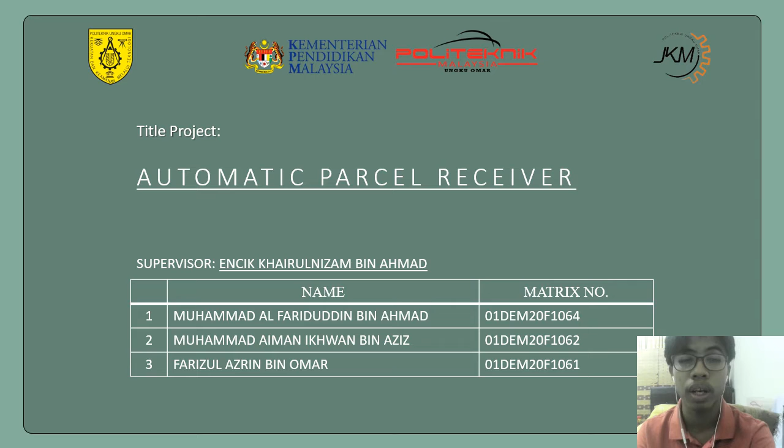This is the title of our project, Automatic Parcel Receiver. To give a glimpse of our project, I will explain a little about it. As the name suggests, the project is invented for receiving parcels that have been delivered to us automatically.

Without our presence. So how did we get the idea for this project? At first we discussed what is trending in our society, and we found that online shopping is something everybody in our society is doing right now.

So what is online shopping? Online shopping is a form of electronic commerce which allows consumers to directly buy goods or services from a seller over the internet using a web browser or a mobile app. Nowadays, we literally can have everything we want at the tip of our fingers. And of course, we need money to have everything.

This is because we literally can do online shopping with any device we have, such as smartphone, desktop computer, or tablet. It also saves our time because just by clicking on the item we want, the item will be delivered directly to the address we set.

How will our project be of help to people who love online shopping? We have recognized some problems when we do online shopping, and the project will help solve these problems. So what are the problems that occur when we do online shopping?

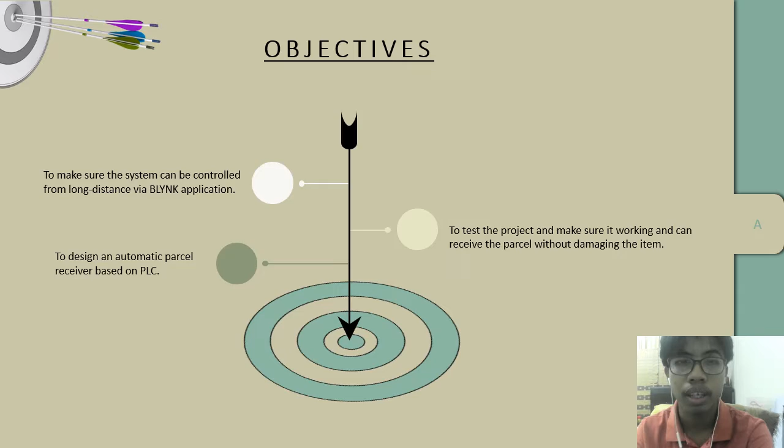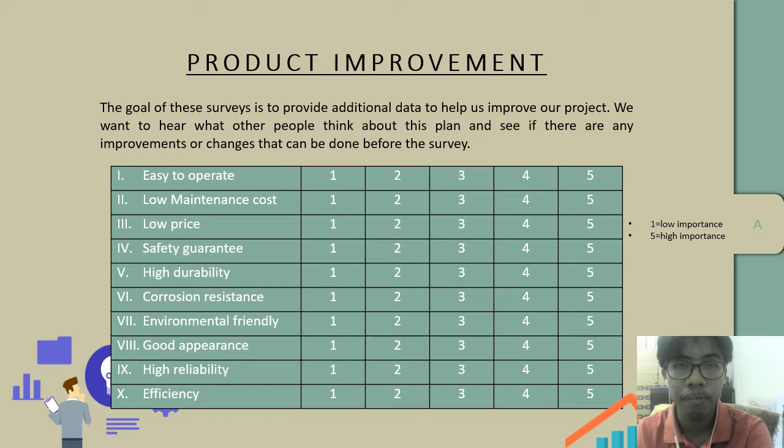So we have done some survey for our project to see people's opinions on what aspect or criteria of our project we need to focus on. The criteria listed here are: easy to operate, low maintenance cost, low price, safety guarantee, high durability, corrosion resistance, environmental friendly, good appearance, high reliability, and lastly efficiency.

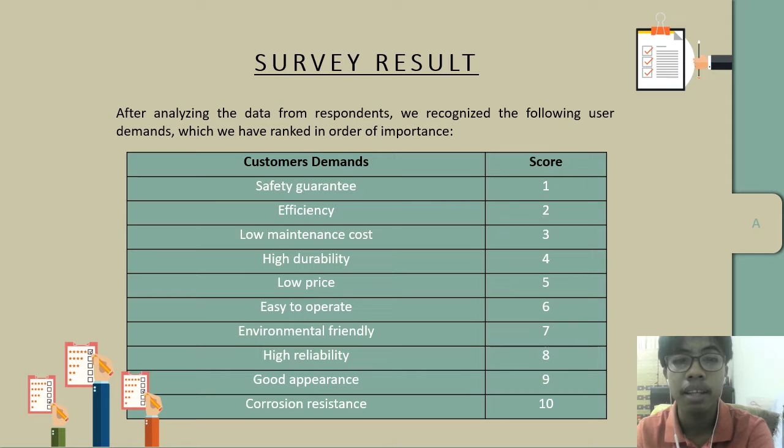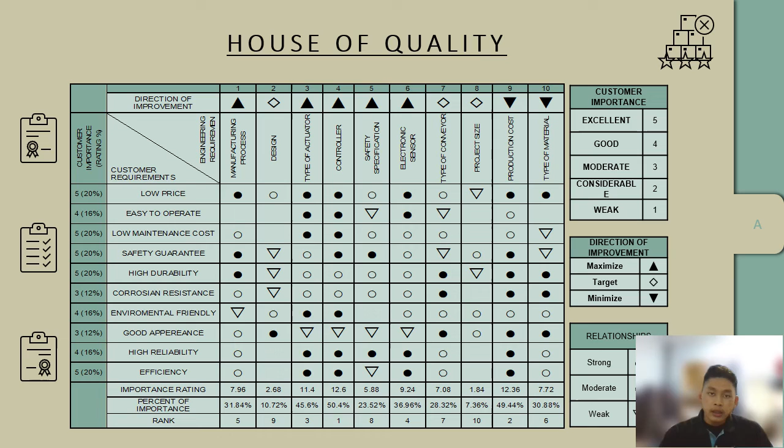By scoring the importance from the survey questionnaire and their relationship with the technical specifications using 1, 3, and 9 — where 1 indicates weak, 3 moderate, and 9 strong — we discovered that we need to focus on the controller of our product, based on the calculation performed in the house of quality matrix. Next is the concept generation.

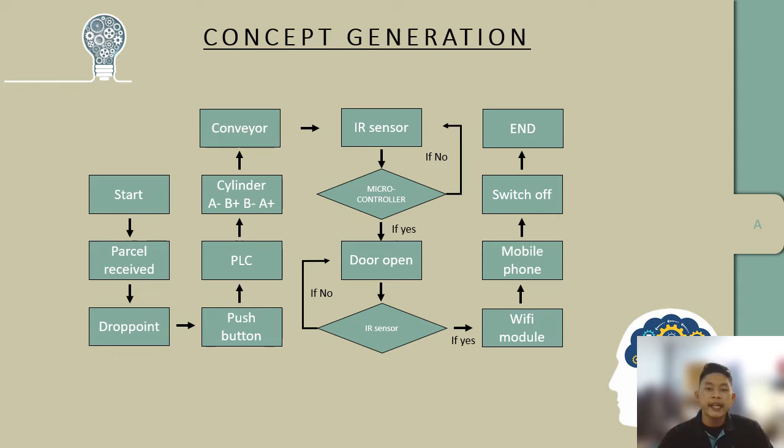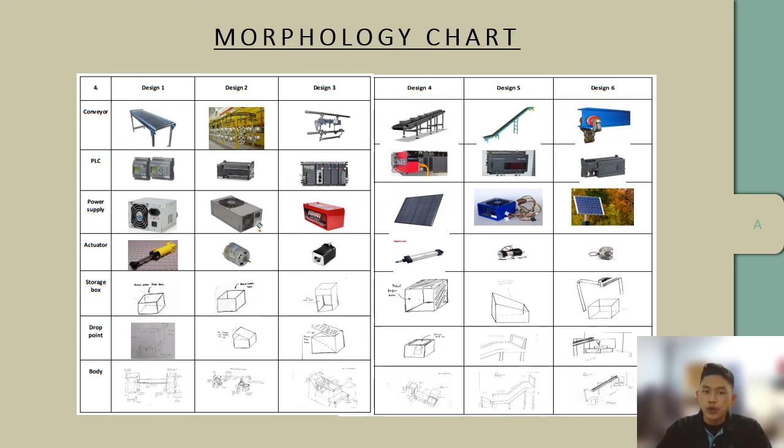After that, we created a morphology chart to know what components each design uses. From the morphology chart, we expand our ideas on how to design our product, and also determine the necessary components, such as what type of conveyor is relevant to use, or what type of PLC controller is suitable for our product, and so on.

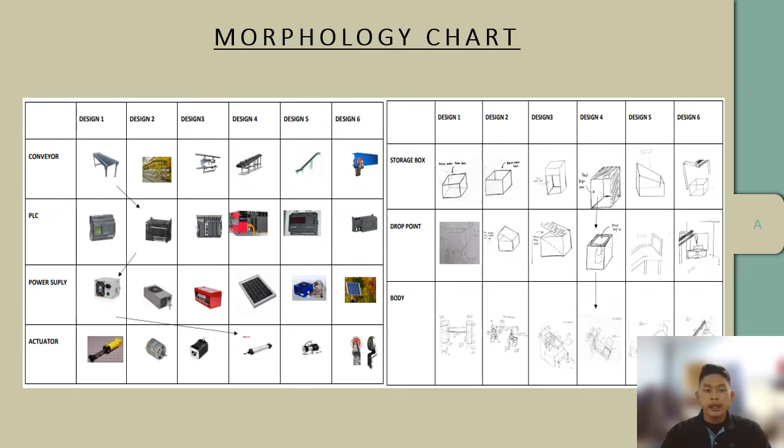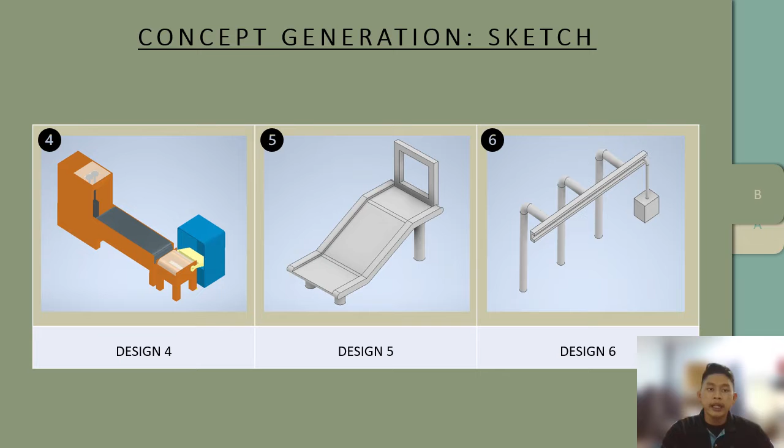Here is our sketch of the concept — this is the sketch for designs 1, 2, and 3, and this is the sketch for designs 4, 5, and 6. From these designs we can know how our product will look, and we will try to explain them one by one.

This is the first concept design in CAD drawing. As we can see, this design uses a pneumatic actuator and a roller conveyor.

This is the bill of material for this concept and the exploded view, which lets us see how this concept is designed more clearly. It uses 10 cylinders in total — 4 connected to 2 stages each to lift the stage, and the other 2 connected to the main body and second body of the project, to move the parcel to the conveyor and into the box. It uses 16 rollers wrapped with a conveyor belt for the transferring system, and has a storage box at the end of the design to keep the parcel safe.

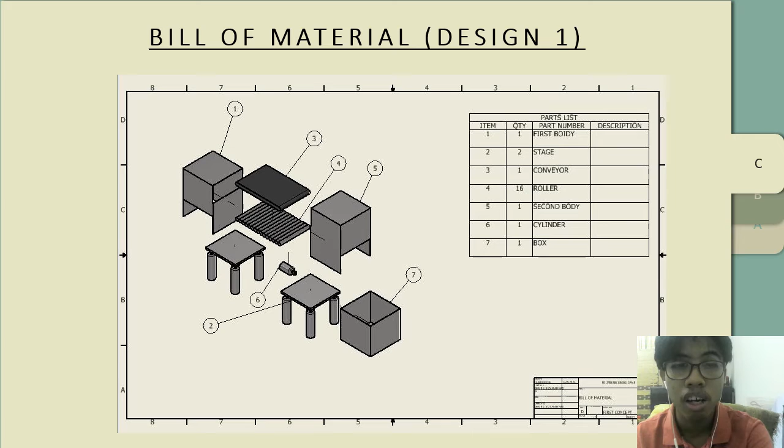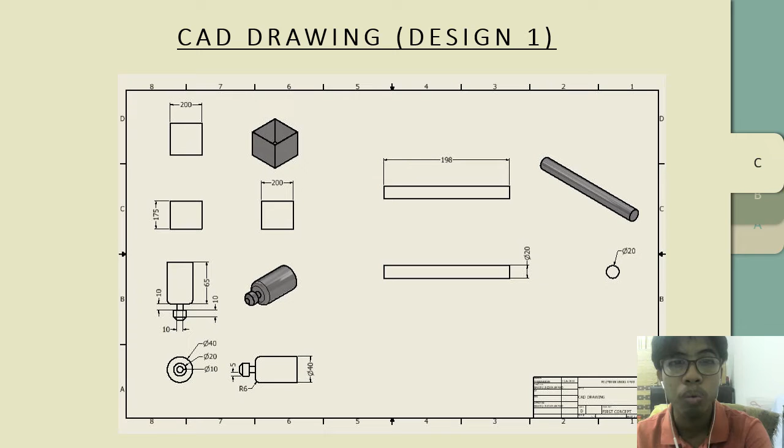This is the detailed drawing of three components: the storage box, cylinder, and roller. This is the cylinder, which will be connected with the second body, and the reason I made an orthographic drawing for this cylinder is that it has a different measurement from the other 9.

This is the conveyor belt that will be wrapped around the 16 rollers. Last but not least, the stage for this project, where the parcel will be placed, which will go upwards and downwards using 4 cylinders as its actuator.

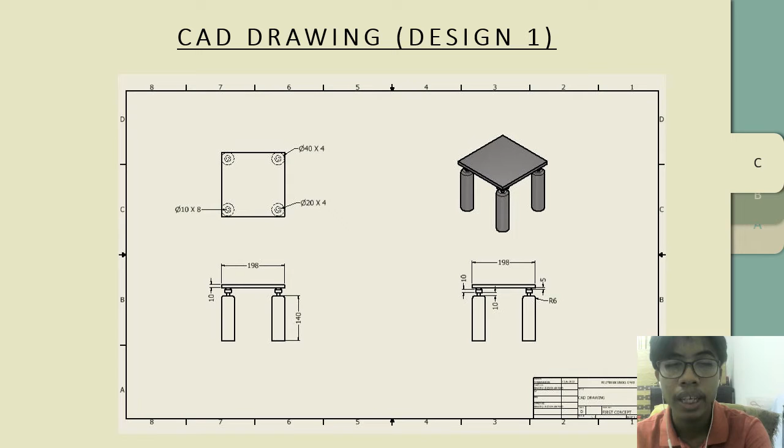This is concept design 2. For this concept, we have the same actuator as design 1, which is pneumatic, but instead of using a roller conveyor to transfer the parcel, I use a hanger conveyor. The hanger conveyor will carry the parcel from the main body to the stage using a net basket hanged to the rail slide.

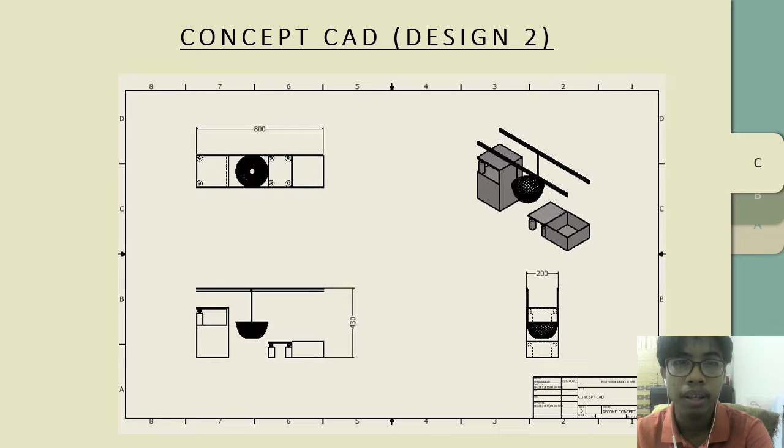Same as design 1, we will look at the bill of materials for design 2. We have the main body connected with 2 cylinders, 2 railways that will connect to the wall or something that can fit the railway position, 1 net basket to carry the parcel, and 2 ropes that act as connectors between the railway and the net basket.

As for the stage, it will have 4 cylinders: the first 2 act to move the stage upwards, and the other 2 to move the stage to a 45-degree position, so the parcel can be removed from the net basket to the storage box at the end of the design.

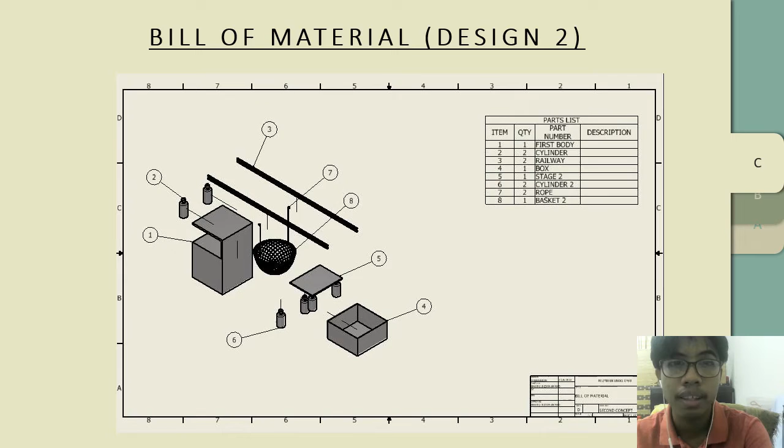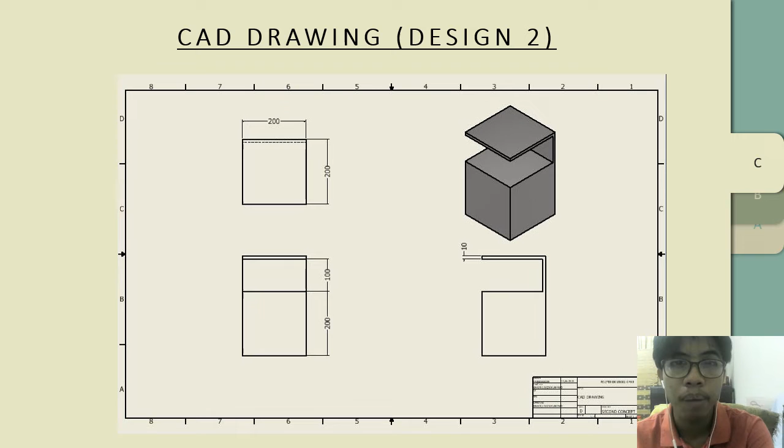Now we will see each part in orthographic drawing. This is the main body; the design allows the stage of the body to be lifted only 45 degrees to the right. To move it 45 degrees to the right, we use a cylinder controlled using pneumatics. This is the stage.

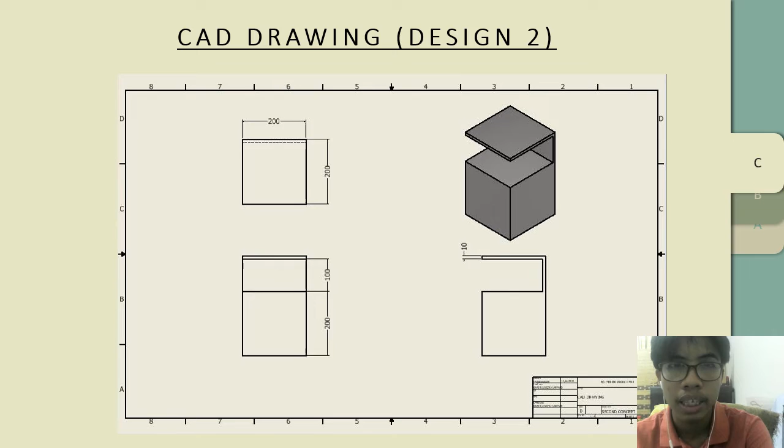As for the stage, there are 2 phases. In the first phase, the cylinder connected to the stage will lift the stage upwards, so the net basket will have a flat surface.

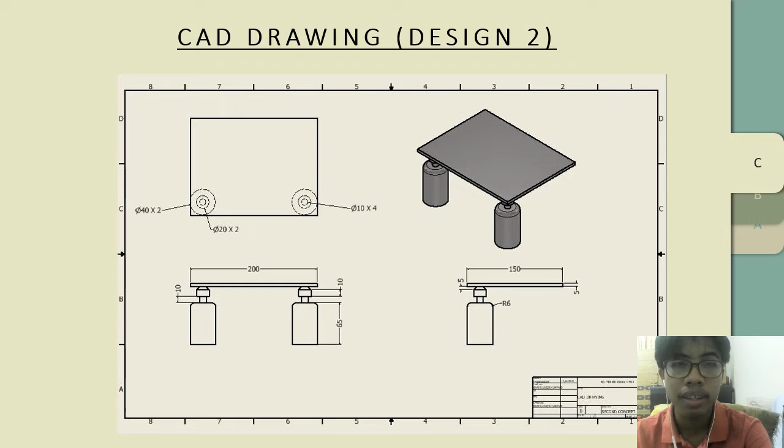In the second phase, the 2 other cylinders, mounted separately from the stage, act like the cylinder for the main body, moving the stage upward to the right only until 45 degrees, so the parcel can be removed to the box.

This is the net basket. The net basket will be built so it will not stretch when it carries something, so the basket will not crash with the stage.

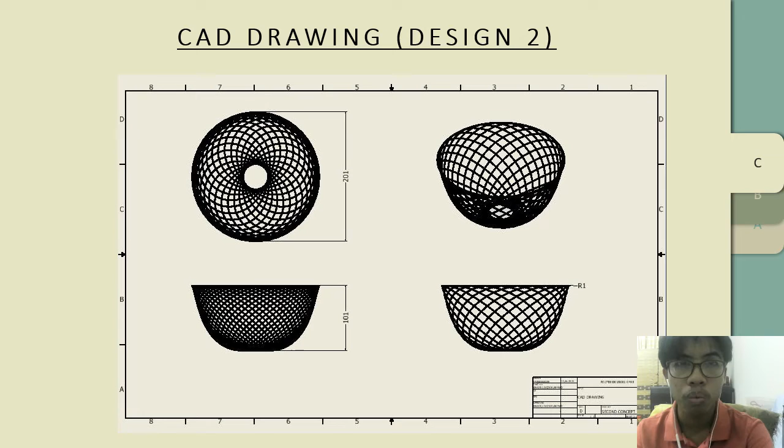This is cylinder 1 and cylinder 2. The cylinder on the left side is to move the main body 45 degrees upward and downward. On the other hand, the cylinder on the other side is for the stage.

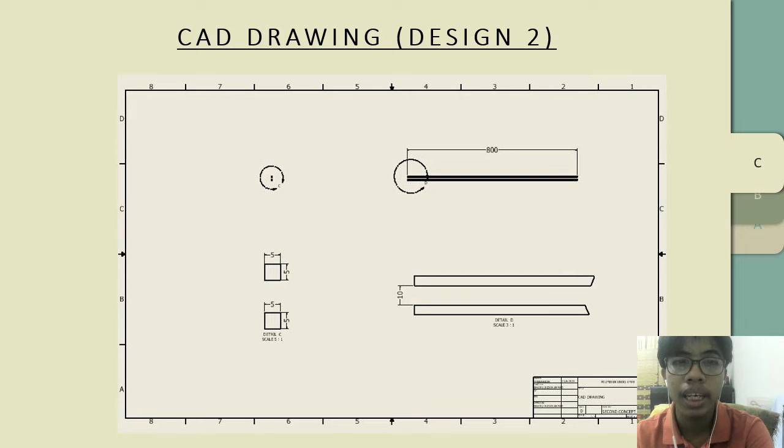This is the storage box and the rope that will be connected to the railway and the net basket. In the last drawing, we have the railway that will determine how far the net basket can go.

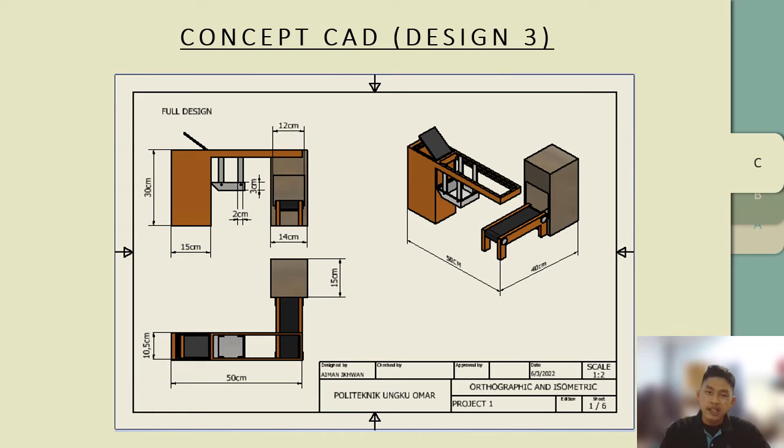For the third design, I decided to use a rail path and belt conveyor for our product because I thought we could reduce the cost by using the 2 conveyors. For this design, our product uses the door type for the drop point, and the storage box is just a storage box without any sensor inside it.

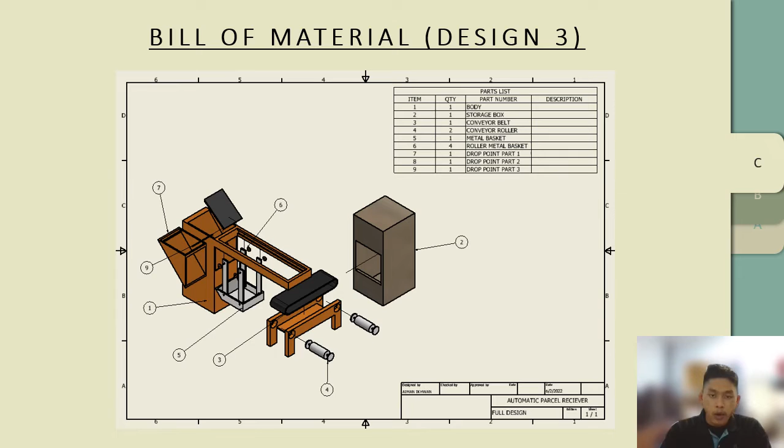This is the bill of materials and the exploded view of my design, which consists of body, storage box, conveyor belt, conveyor roller, metal basket, roller metal basket, drop point part 1, drop point part 2, and drop point part 3.

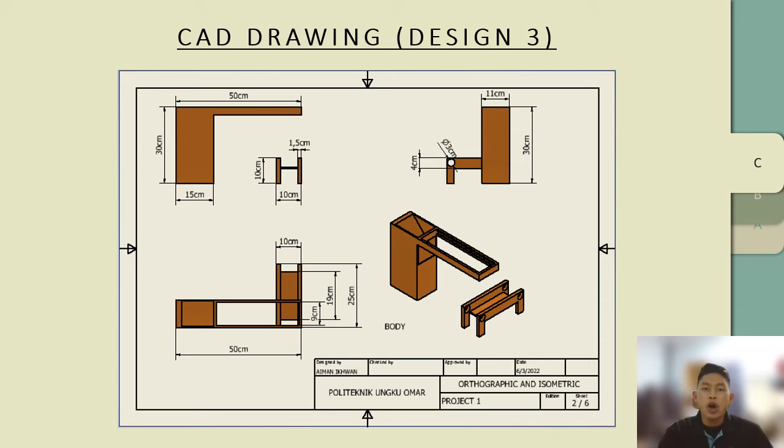This is the predicted dimension of my product, and this shows the dimension of the body of my product.

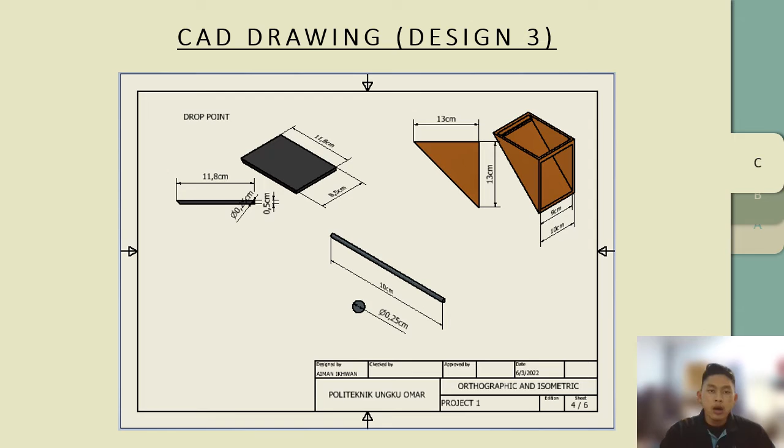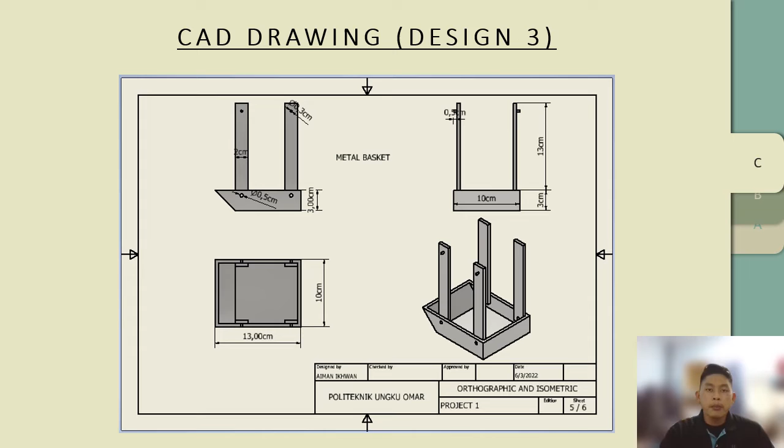This is the dimension for all the components at the drop point. This is the last one, and this is the dimension of the metal basket. It is made from metal, as the name suggests.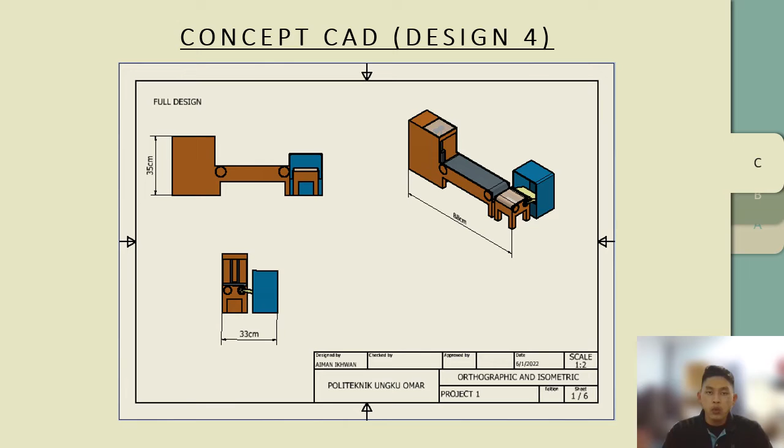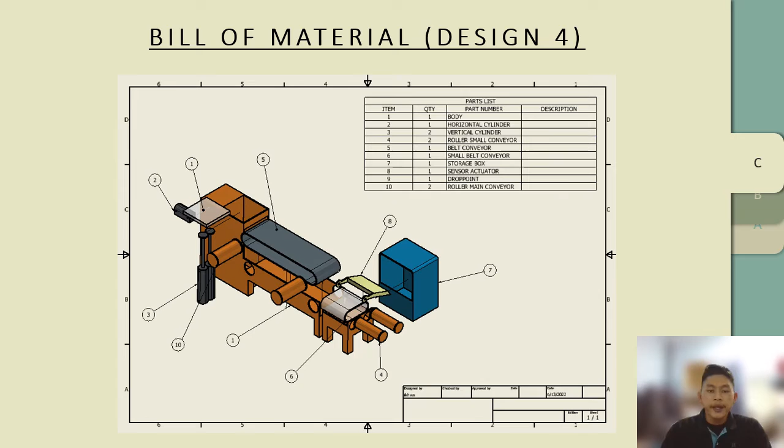Next is the bill of materials for design 4 and the exploded view, which consists of body, horizontal cylinder, vertical cylinder, roller, small conveyor, belt conveyor, small belt conveyor, storage box, sensor actuator, drop point, and roller main conveyor. This slide shows the dimension of the body, which has two separated parts.

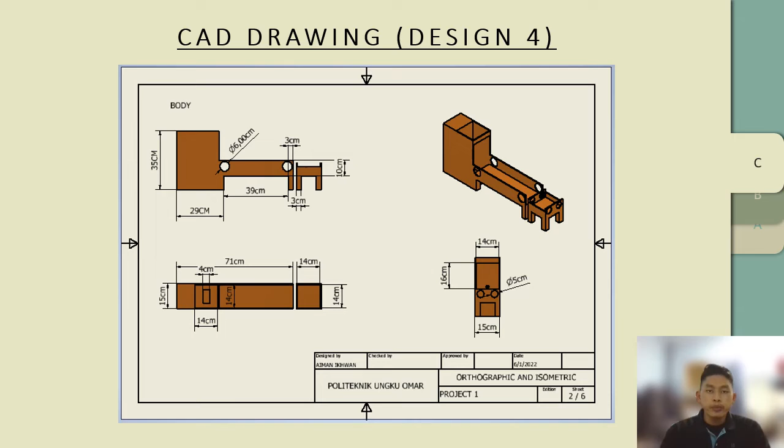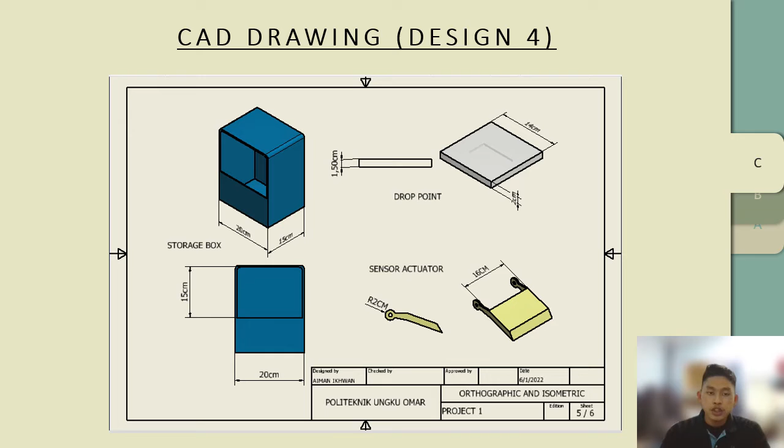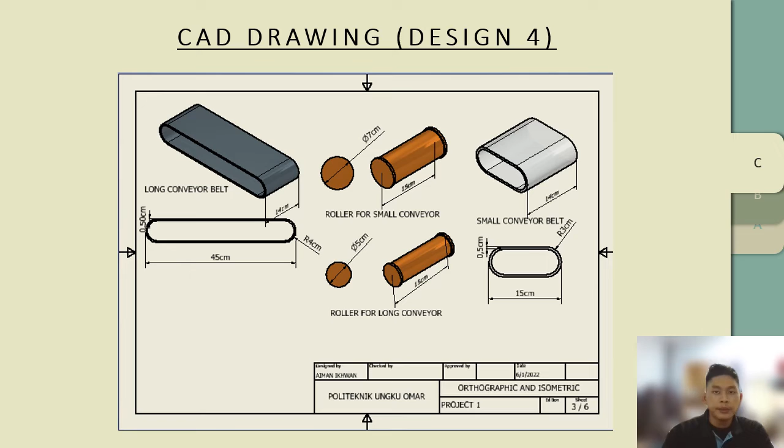Okay, and last is the dimension for conveyor belt, long and small, and between that is the roller for the conveyor belt, which idler roller for the conveyor.

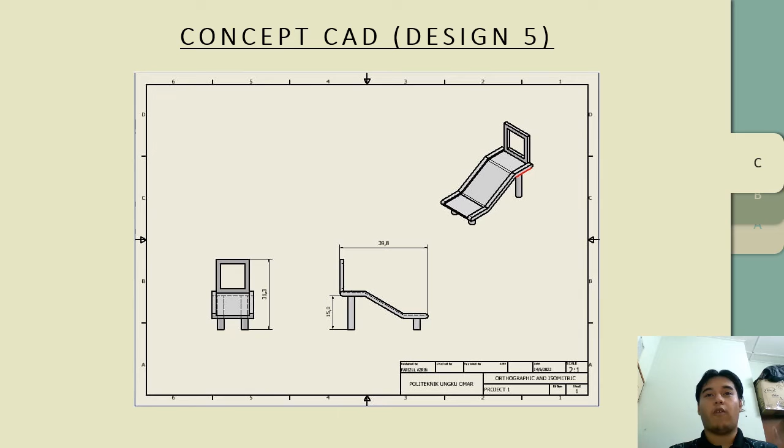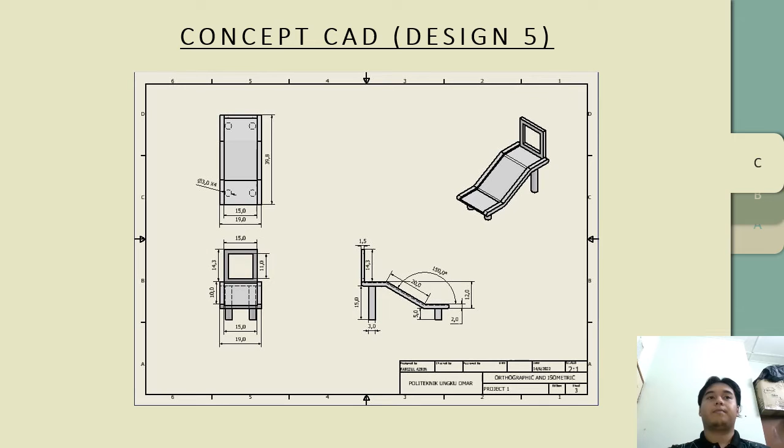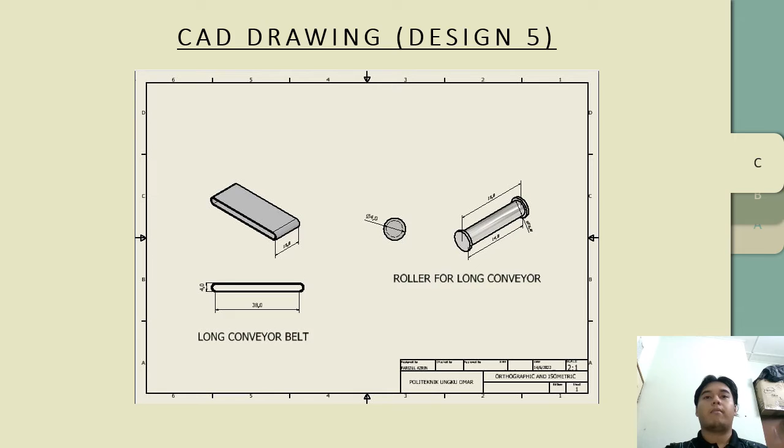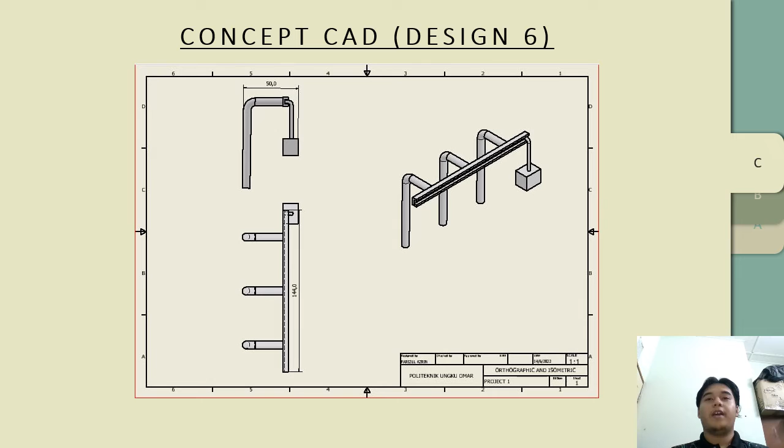This is the concept CAD design 6. This is actually like the hanging conveyor. The parcel will be put in the box at the conveyor and will move to the drop point safely. The bill of material for this design: the first is the hanging conveyor, the second is the box, and the third is the pole. This is the full dimension for the CAD drawing design 6. As you can see, its height is 70 and its width is 144.

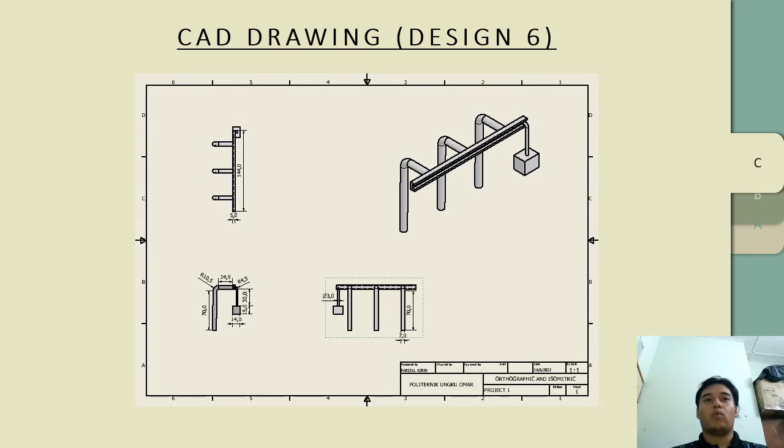This is product tree for our project. The first one is system. Our project uses the pneumatic system and conveyor system. The second one is actuator. We use infrared sensor, Wi-Fi module, 5/2 way DCV and relay. For the housing, we have the body, the drop point, and the storage box. For the controller, we use two controllers, which are the PLC Omron controller and Arduino microcontroller.

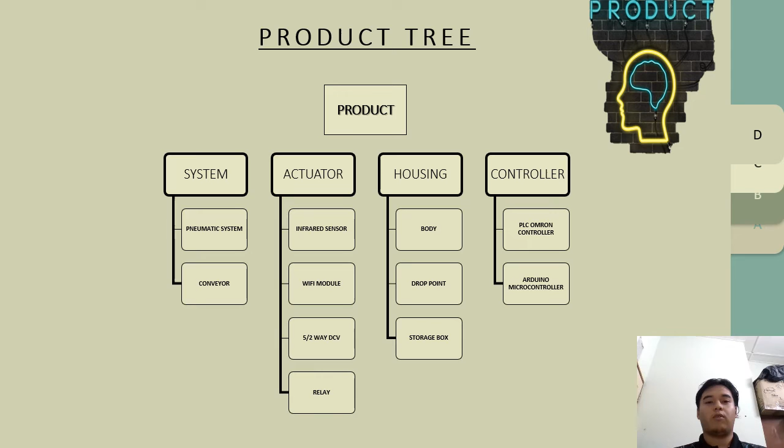This is the project block diagram, and it will be like this. The input is the push button, which when pushed will trigger the pneumatic system, conveyor system, and microcontroller simultaneously. After the parcel is received and the push button is pushed, the pneumatic system will make its sequence, which is A minus, then actuated by IR sensor, then make a B plus signal, then do the same like B plus, B minus, and A plus. Next, the parcel will be pushed by cylinder B and reach the conveyor system. After that, the microcontroller functions to control all the sensors from the IR sensor into the mobile phone, which is the output of the system.

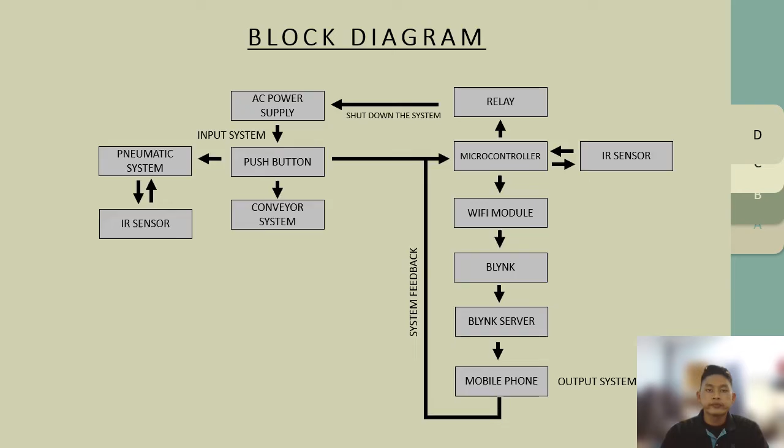This is the circuit of our project for the pneumatic system that we created using Automation Studio, for the sequence A minus, B plus, B minus, and A plus. Here we have the circuit diagram for the external electrical circuit used for safety. At the bottom we created lights as indicators. Green shows the processing running, blue is for the rectifier to convert AC to DC to trigger the microcontroller, yellow is for the conveyor, and white indicates the system is at the shutdown state.

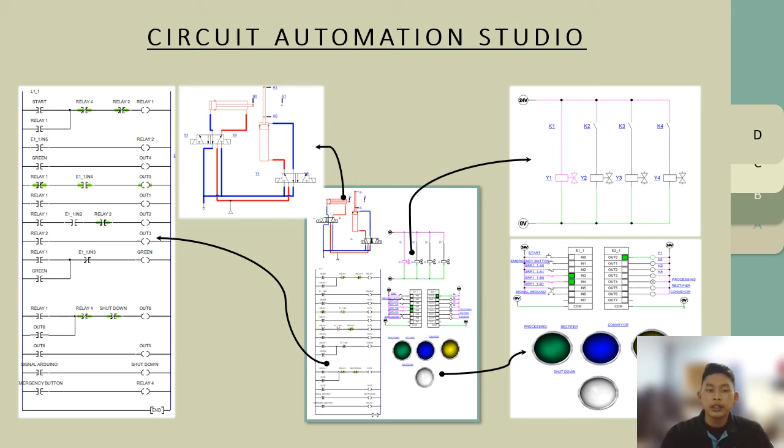This is the simulation of the pneumatic circuit that we created using Automation Studio. We push the start button: A minus, B plus, B minus, and A plus again. At the bottom it shows the light to indicate our process, and we play it 2 times.

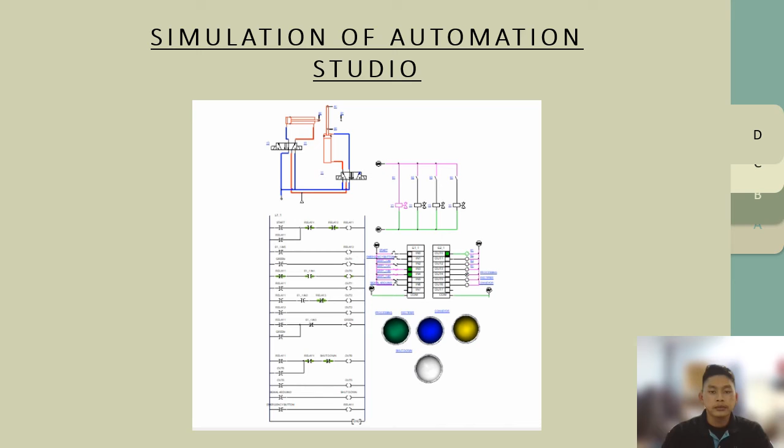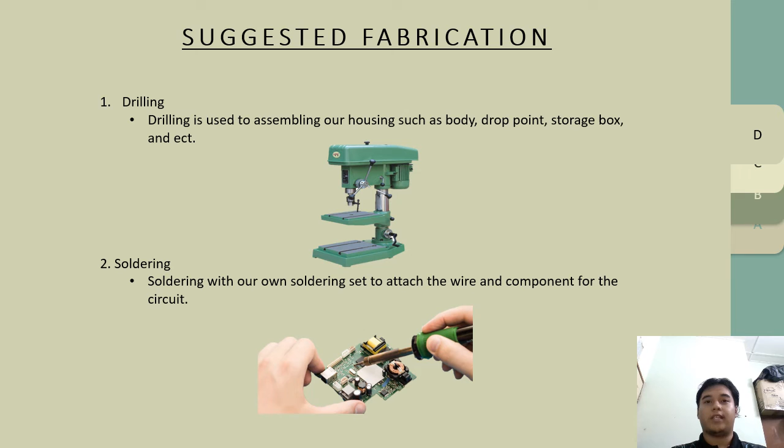For the suggested fabrication, the first one is drilling. Drilling is used to assemble our housing such as the body, drop point, storage box, and anything else. The second one is soldering, using our own solder set to attach the wire and components for the circuit.

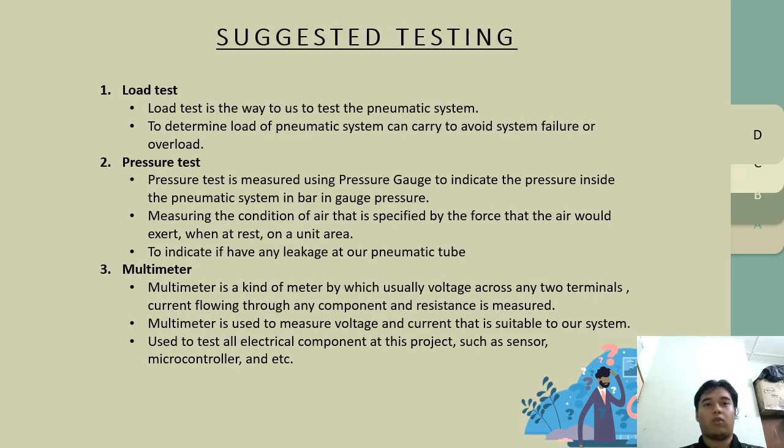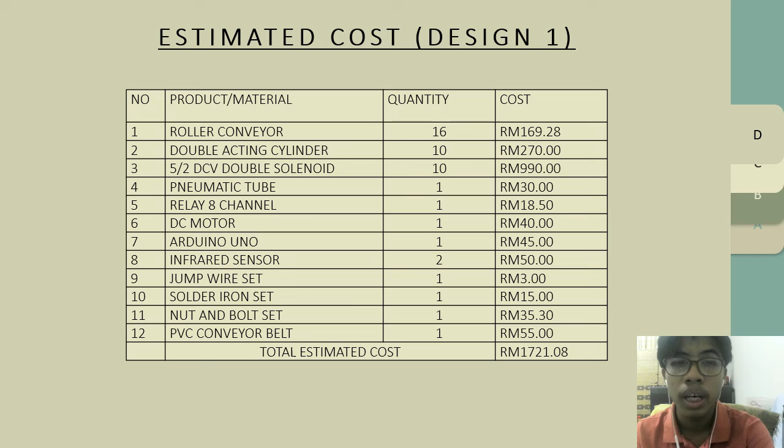Adding with some other components such as pneumatic tube set, and electronic components like DC motor, relays, sensors, and Arduino.

As for the second concept, we have a total of RM1418.90. It doesn't differ much from the total price of concept 1. The only reason it's a little lower than concept 1 is because it used 8 cylinders in DCV instead of 10. It also has almost the same components as design concept 1, which are pneumatic tube, DC motor, relays, sensor, and Arduino. The only difference is the type of conveyor set that we need to buy.

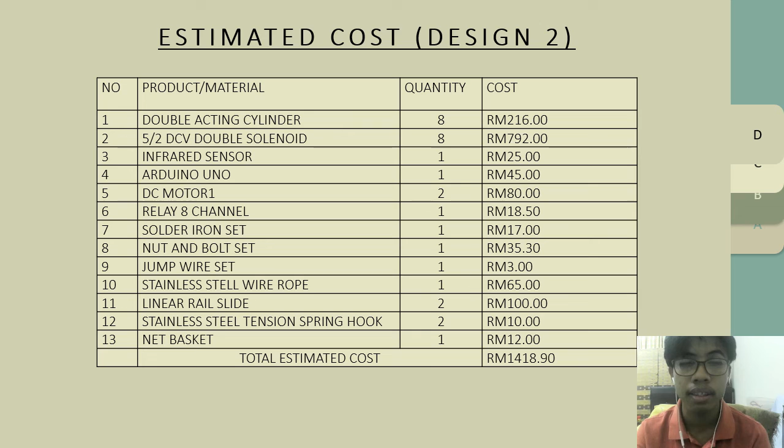Okay, this is the estimated cost for design 3. It consists of conveyor belt, mini linear rail, toggle switch, DC motor, screw M2.5 10mm, Arduino Uno, infrared sensor, rectifier STS-901, idler roller conveyor, jumper wire set, solder iron set, screwdriver set, and relay 8 channel. So the total for this estimated cost is RM461.90.

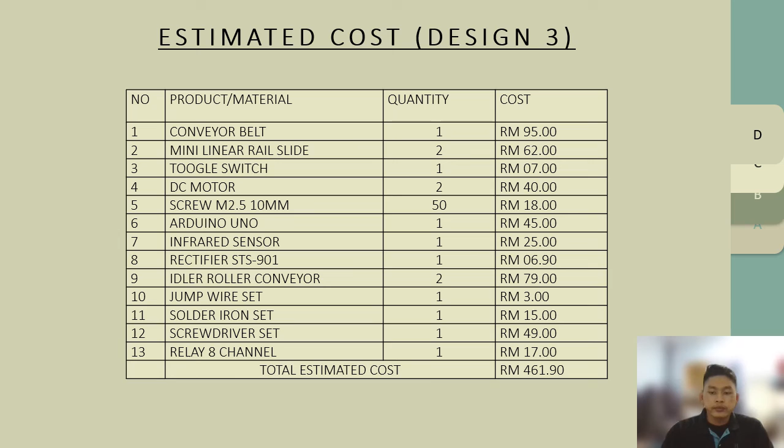And this is the estimated cost for design 4, which consists of double acting cylinder, 5/2 DCV double solenoid, pneumatic tube, DC motor, conveyor belt, Arduino Uno, infrared sensor, screw M2.5 10mm, idler roller conveyor, jumper wire set, solder iron set, toggle switch, Wi-Fi module ESP8266, relay 8 channel, rectifier STS-901. The total estimated cost for design 4 is 559 ringgit.

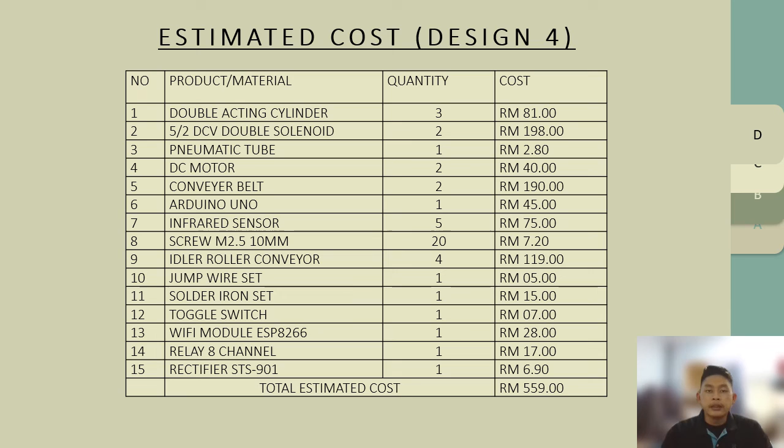So this is the estimated cost for my design, which is design 5. The first one is DC motor, quantity 2, costing 40 ringgit. The second one is conveyor belt, quantity 1, costing 95 ringgit. The idler roller conveyor, I use 2 and it costs 29.75 ringgit. The fourth one is Arduino Uno, I use 1 and it costs 45 ringgit.

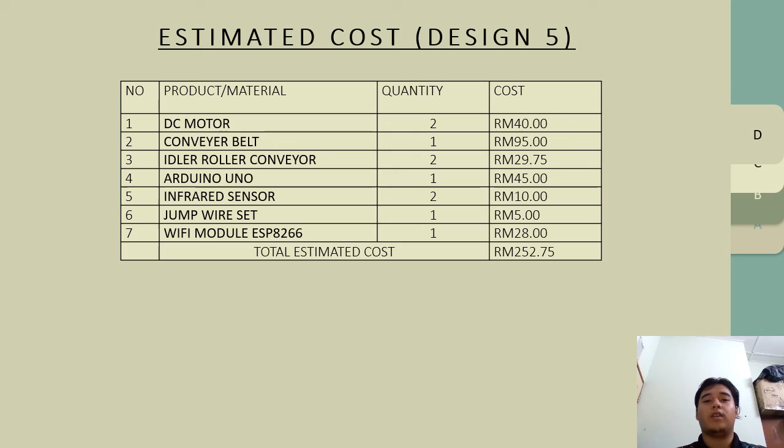Next is the infrared sensor, I use 2 and it costs 10 ringgit. Next is jumper wire set, I use 1 and it costs only 5 ringgit. The last one is a Wi-Fi module ESP8266, I use 1 only and it costs 28 ringgit. So the total estimated cost for design 5 is RM252.75.

So this is the estimated cost for design 6. The first one is box, quantity 1, cost 30 ringgit. Second one is hanger, quantity 1, cost 52 ringgit. The third one is roller, quantity 1, costs 43 ringgit. The fourth one is Arduino Uno, quantity 1, costs 45 ringgit. The fifth one is jumper wire set, quantity 1, costs 5 ringgit. Next is metal pole, quantity 3, costs 200 ringgit.

The next one is the infrared sensor, quantity 2, costs 10 ringgit. The last one is Wi-Fi module ESP8266, costing 28 ringgit. So the total estimated cost for this design is 413 ringgit.

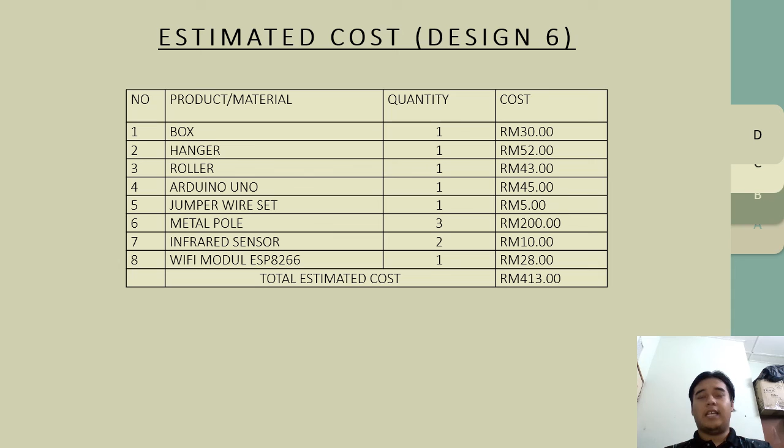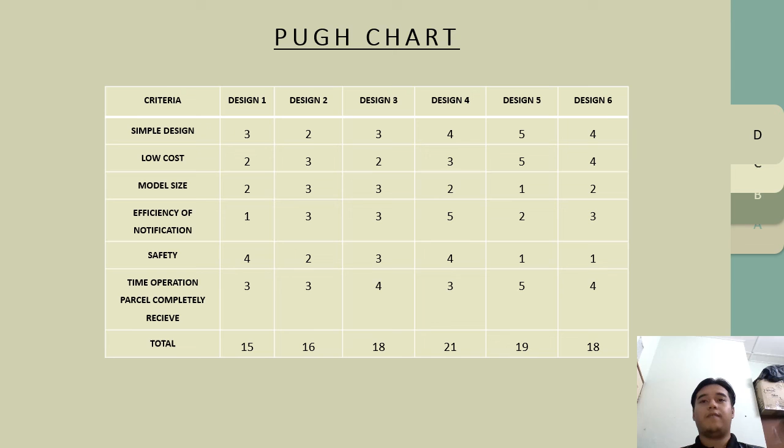So the final design is design 6. For simple design it got 4 marks, low cost got 4 marks, model size got 2 marks, efficiency of notification got 3 marks, safety got 1 mark, and time for parcel completely received got 4 marks, and the total will be 18.

So for the objectives, the project aims to first design a parcel receiver conveyor system that can work using a pneumatic system and PLC. Second is to simulate the project using software. The third is to build and test the conveyor to observe the response of the sensor, pneumatic movement, and speed of the conveyor.